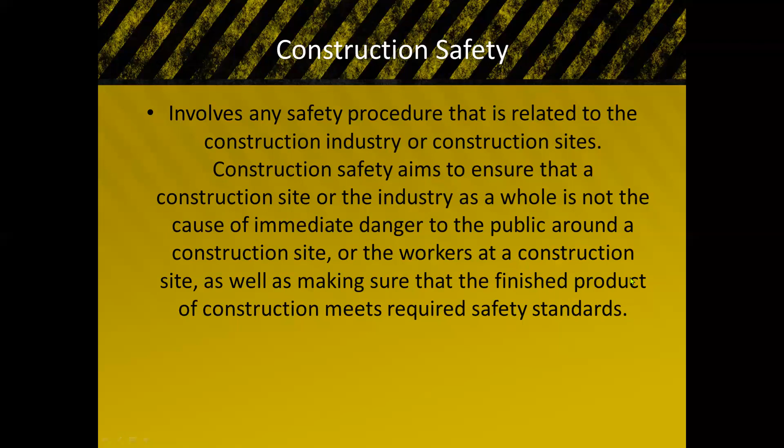Excavation. During the excavation project or activity, meron din tayong mga danger na maaaring ma-encounter during the construction operation in the project. It is defined as making a depression or cavity in the earth's surface. The principal hazard associated with excavation are the following. Maaaring masuffocate ang worker sa hukay, or tinatawag nating suffocation.

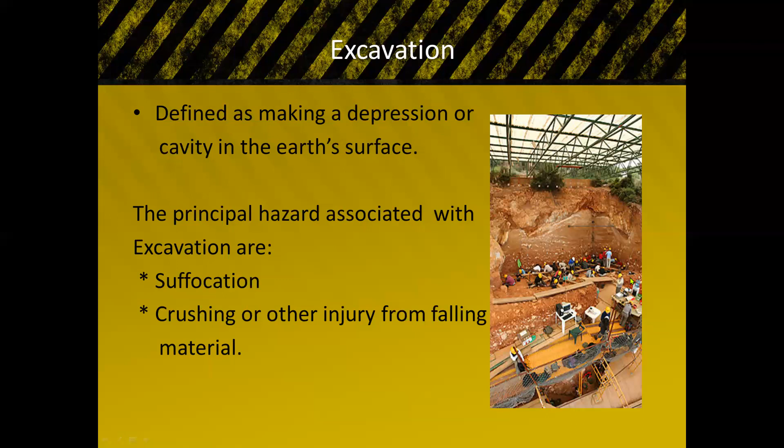Kailangan alam natin yung mga precautionary measures na maaari nating gawin habang nagko-construct ang mga manpower natin inside the construction site habang ito'y nag-excavate ang mga tao. And then crushing or other injury from falling debris or falling material, kailangan tiyakin natin na safe yung mga employees natin, nakasuot ng hard hat, at kung ano pang mga PPE na kailangan nila habang sila ay nag-work.

Concrete formwork and shoring. Safety in the installation of a finished concrete structure starts with its design. A competent engineer should design the formwork for all structures, requiring the use of shoring and for large pours to be made at below ground level.

Some of the hazards associated with concrete installations are failure of inadequately designed installed forms and shoring. Tsakin lamang natin ang mga forma natin, lalong-lalo na sa ating mga slabs and beams na matitibay yung mga yan. And hindi bibigay ang konkreto o ang buhos na ating ini-install during the concreting process.

Pre-stressed concrete includes use of exposed steel, bar strands with much latent energy. So this is another hazard associated with concrete installation.

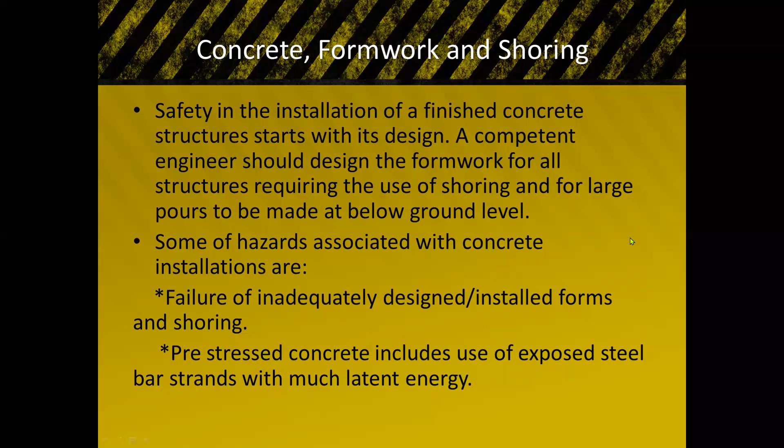Let's talk about scaffolding and ladders. The major hazards associated with the use of scaffolding and ladders are: first, we have falling men. Second, falling materials or tools.

Dapat ang mga scaffolding natin, tiyakin natin na matatag. And then may tamang tuntungan yung ating mga workers. Make sure na may mga safety belt sila at saka hard hat and other personal protective equipment para ma-avoid natin yung aksidente during the construction.

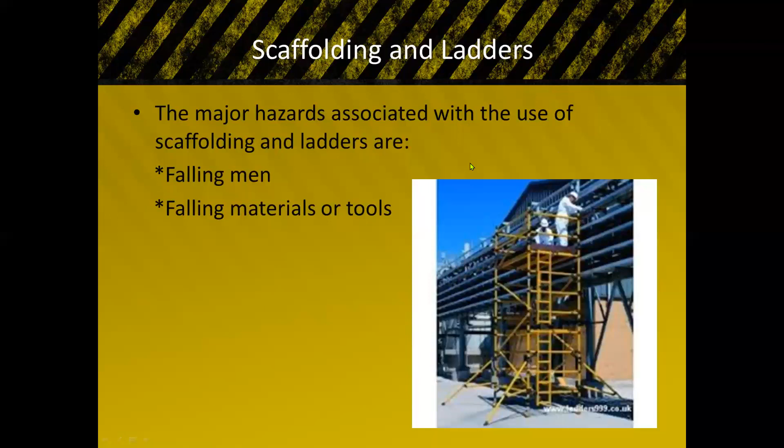Welding, burning, and cutting. The major hazards associated with burning and welding operations are heat and fire. Proper care of welding and burning equipment is a requisite for minimizing hazards. All gas cylinders shall have their content clearly labeled.

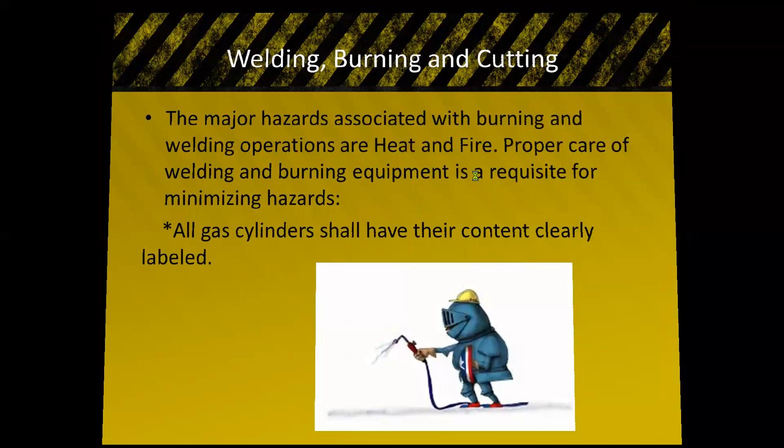Hand and power tools. Appropriate personal protective equipment, such as safety goggles and gloves, must be worn to protect against hazards that may be encountered while using hand tools. Power tools must be fitted with guards and safety switches. They are extremely hazardous when used improperly.

So, ano yung mga hazards na associated when using hand and power tools? First, failure or disintegration of tool. Second one, proximity to moving or cutting parts of tool.

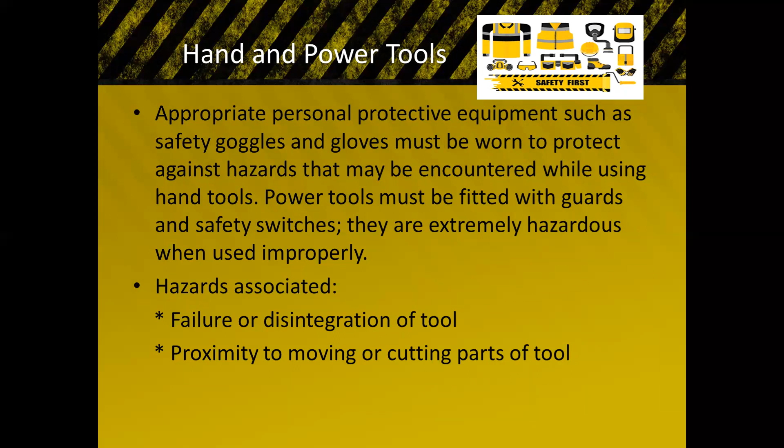How about materials handling? Safe lifting is only one aspect of material handling. Transporting the load safely is the other. How you move or carry and put down the load is just as important as how you pick it up gently. The hazards associated with material handling are: first, falling or moving material and equipment. Second, pinching or crushing.

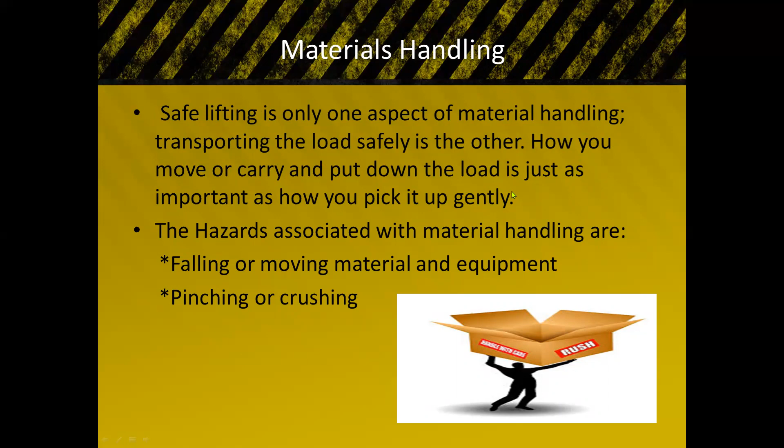Industrial. Inherent with the use of productive mobile equipment are many potential hazards that can result from large mass in motion.

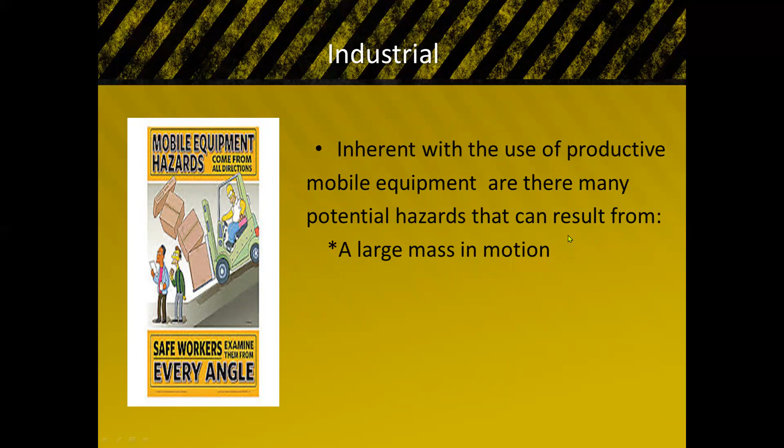When it comes to electricity, actually, electricity is a great friend but a deadly enemy, ang sabi nga nila. The major hazards of electricity are electrical shock and the accompanying possibility of death. Fatal electrical shock can be sustained with low voltage of 120 or less, current as low as 50 to 200 milliamperes.

So make sure na laging ligtas ang ating mga employee sa anumang sakuna or danger inside the construction site. So kailangan lahat ng mga nabanggit ay laging aware ang ating company o ang ating construction firm. And take note, lagi talagang dapat mayroong safety officer na nakatalaga sa isang construction project.